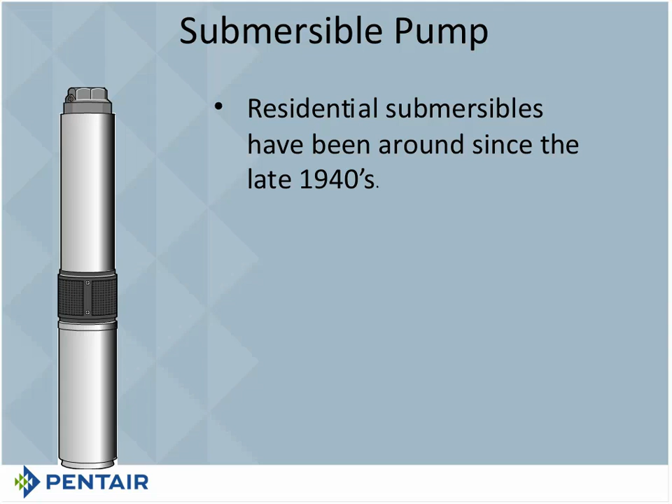So let's get started talking about submersible pumps now. The first point is that the residential pump we know today has been around since the late 1940s. It was really the motor that needed to be developed—they had the technology for the pump end, but they needed to get that motor small enough. They had pumps that were 6, 8, 10 inches, but a residence doesn't need that much water, so finding a smaller motor to put on a smaller pump end is what they needed. Once they got that in place, they were ready to take off.

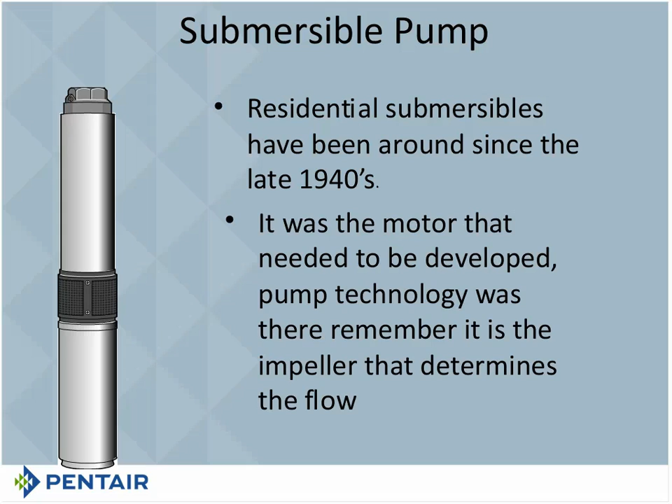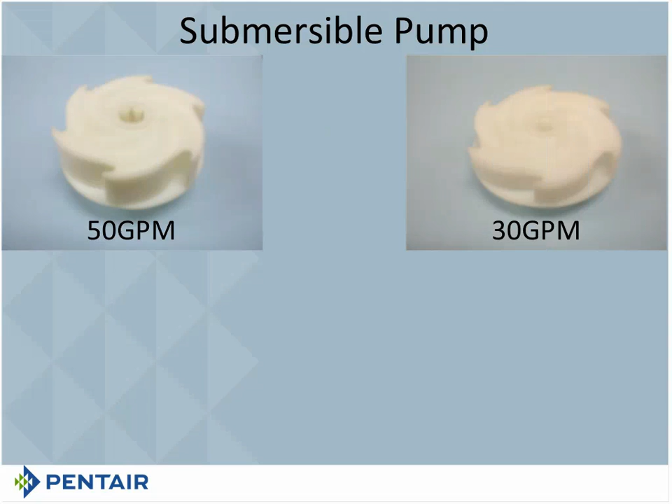Now let's talk a little about impellers. Looking at them, you'll notice there's a 50-gallon-a-minute impeller, a 30-gallon, a 20, and a 10. Some things they have in common, some things are different. First, let's talk about diameter—that's common to all of them, about 3.5 inches, and you can't make them any bigger than that. So the bottom line is all your 4-inch impellers are going to be about the same size in diameter.

Because they're the same size, we stack these pumps. These are still centrifugal type pumps—they work off centrifugal force. It's just that now you stack the pumps together rather than have individual pumps, because a small impeller like that wouldn't be able to give you much head.

What they have different is the port width. You'll notice that port width is different across them, and it's the port width that helps determine the flow rate—it gives you the maximum flow rate of the pump. So when they say it's a 50-gallon-a-minute pump, you'll notice it's got a big wide port width. If you look at that 10-gallon-a-minute pump, you can hardly see there are 2 pieces of plastic there. So it's very important.

A similarity they have—let's count them: 1, 2, 3, 4, 5, 6. They've all got 6 vanes. That's pretty much true no matter whose impeller it is, whether it's ours or one of our competitors'—they're all pretty much going to have 6 vanes.

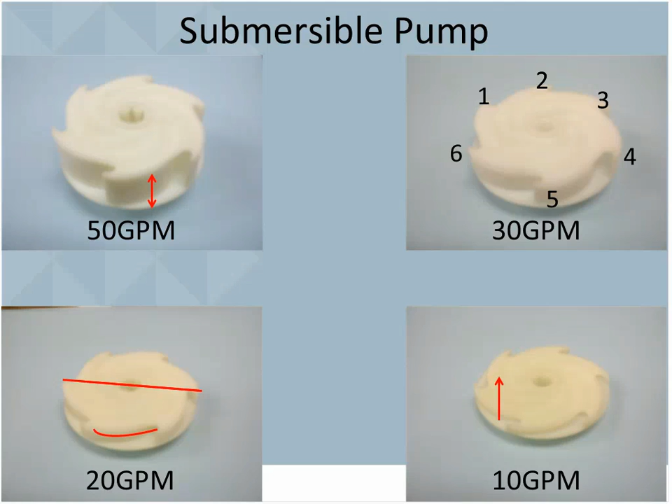So those are the things that are similar and some that are a little different. They've all got an eye, and again the eye is going to be a little different—notice the one on the left, the 10-gallon eye versus the 50-gallon eye. Remember, those impellers are the same diameter, so when it comes to the eyes, the eye with the 10-gallon is a little bit narrower than the eye with the 50-gallon.

And again, that's because we want to put more water through there. There's the eye right there. And then you'll notice in the middle there's a hub. You can see that the hub on the 50 is much deeper than the hub on the 10. Part of that is due to the fact that you've got that large port width, so that's going to require more hub.

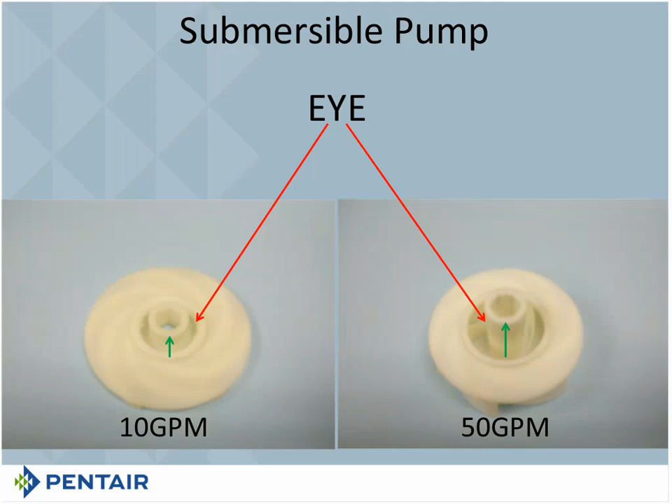The hub is the part that goes over the shaft and how you keep the impeller in place on that shaft. Now, every submersible pump, no matter who makes it, has to have an impeller. They also have some kind of a plate.

They all might be made a little differently. We make our plate like this. You can see there's a stainless steel piece in the middle, a big plastic piece on the outside, and if you look carefully, a little smaller plastic piece that fits over the top of that stainless steel piece.

The reason for that is because we're going to sonically weld these together. We're going to take these three pieces and use sound waves to heat up the plastic, and as that plastic gets heated up, it's going to melt together, making this all one piece.

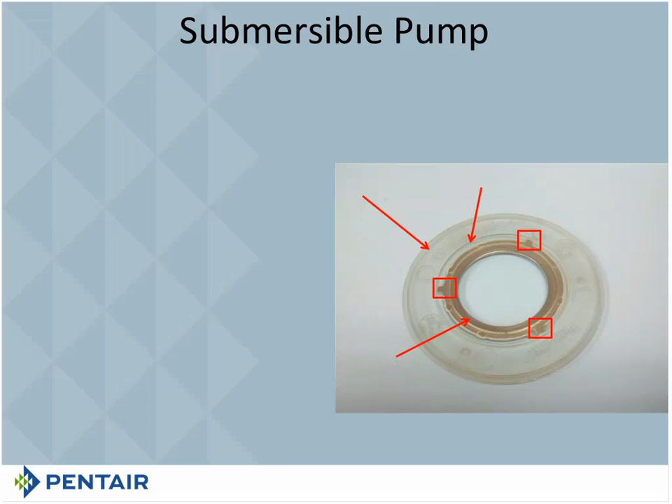You can see there's three little spots where the stainless steel has a little nib sticking out of it. The big plastic piece has a little spot where that fits right in. So when they set that in place and then put the small plastic piece over the top of it, that keeps the stainless steel piece from moving. That's what that's for.

Now the other thing that happens here is the eye of the impeller rides on that stainless steel piece. Because of that, all of the down thrust moves off to the side of the plate, pushed in the direction of that yellow arrow you see there.

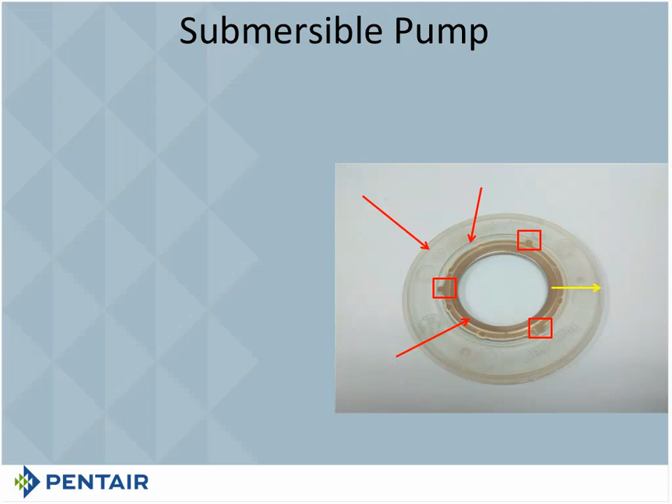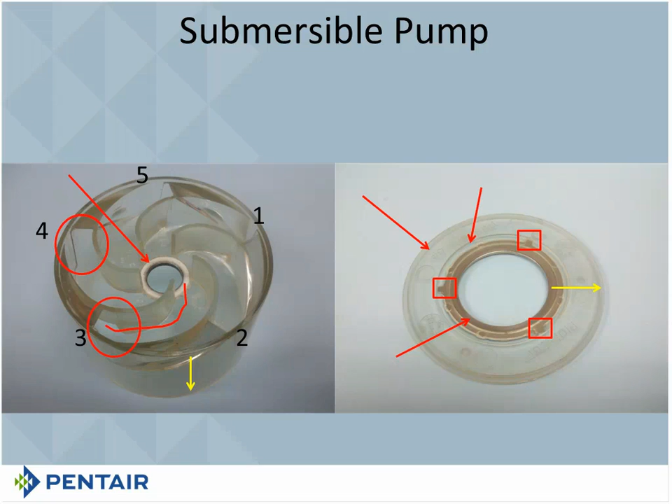I also want you to notice that we use a ceramic seal in the middle. That seal is actually bonded right to the diffuser. When we mold that plastic piece, the seal goes in first, and we mold the plastic right around it. It's got little bumps all the way around it to keep it in place so it doesn't turn.

So it depends on how you want to look at that. You'll see that the shaft hub sticks down, but it goes down into the diffuser and it rides on that ceramic seal. It doesn't put any pressure on the impeller that's below it. And again, that's one way that we eliminate down thrust on the motor.

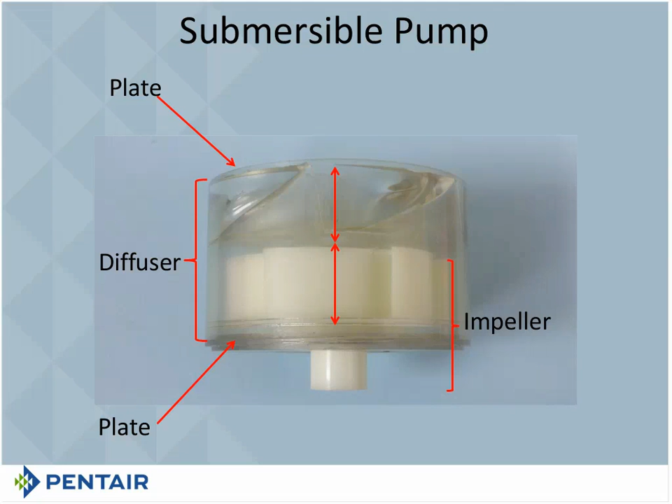So there's your opening for your impeller, and then if you look there, that's where the water is going to go up through the hole into the diffuser so that it can be pressurized and move into the eye of the next impeller or out through the discharge.

If you look at the top stage there, you see the ceramic seal. So the bottom of the hub sticks out at the bottom. The top of that hub goes up against the ceramic seal. There's a little bit extra plastic on top of that hub so that it sticks out and can ride against that seal, and the reason we do that is because that helps for upthrust protection.

If you don't have that upthrust protection there, what winds up happening is the top of the impeller rides against the bottom of the diffuser, and you wind up having some problems. So you eliminate those problems by having that little bit of plastic stick up off the top of the hub and rubbing against the ceramic. The reason they use ceramic is because it's a different material than plastic, so it won't spin weld together.

Now you see the stainless steel ring there. There's a little added extra plastic on that also, so that as the bottom of the impeller, the eye of the impeller, comes down and rests on that stainless steel ring, it holds the actual bottom of the impeller off of the bottom of the plate, or top of the plate. So again, you're not going to get any spin damage.

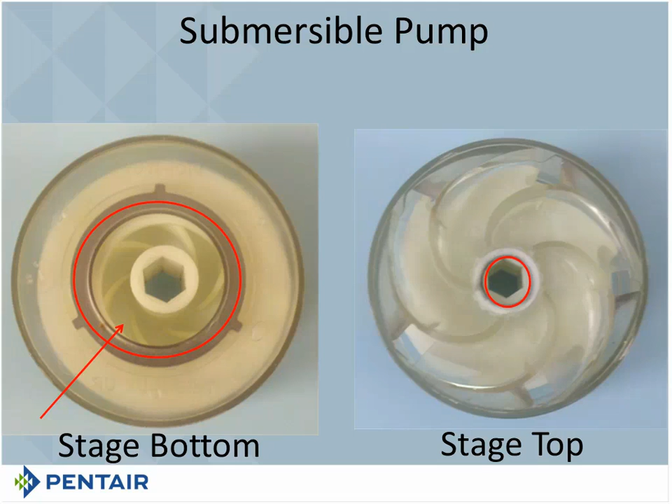Not all of our pumps, but some of our pumps have a thrust pad in them. The thrust pad is a patented area. When you're looking from the top down on the thrust pad, you see that it looks brown. When you're looking at the bottom up, you see that it looks black. That's because the bottom of that thrust pad is a carbon impregnated cloth, which makes it look black.

Then there's a slight little piece of rubber in there. And finally, the brown piece that you see on the top there, that is a stiffener, because what happens is when that cloth gets wet, it loses its shape or its form. So that stiffener helps to hold it in place.

You'll notice also that it is hexagonal, and it fits very nicely over that hub because, in fact, it does exactly that. It fits on that hub, and what happens is when that pump goes into down thrust, that black part is facing the white ceramic seal. So this piece sits between that hub and that seal, and should sand happen to come up between there...

Of course, the main purpose of that thrust pad is to seal a round hole that's in the ceramic. So that ceramic goes all the way out to the edge of the black part there, and of course you've got the hexagonal hub going up through there. You can see that the hub, or the shaft, is not going to touch that ceramic if it's held in the center the way it's supposed to be.

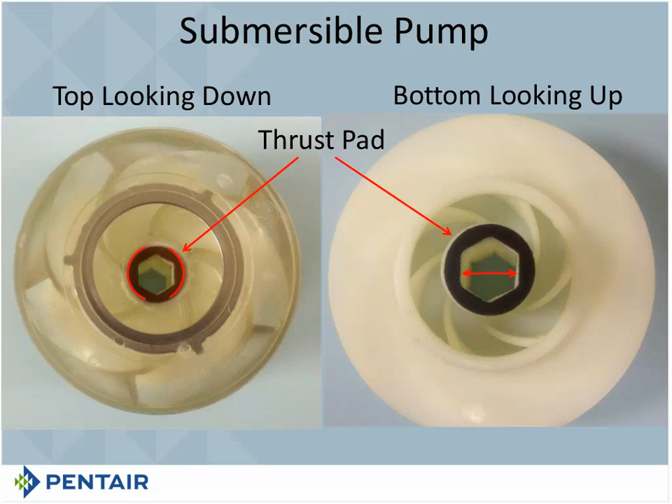But that does create some openings, we'll call them holes if you want to. And so, this thrust pad is going to plug up those holes. So there's your thrust pads there. You can see they are hexagonal, and they can move up and down.

Now of course it doesn't move that far. We're talking tens of thousandths of an inch, not inches. But it does have some play, some movement, and the purpose for that movement is because we want to allow sand to move through the pump. This movement up and down that the impeller is allowed to do, if sand happens to get trapped in there, when it goes to start up it pushes down and can allow that sand to wiggle its way out, so that we always keep that sand moving.

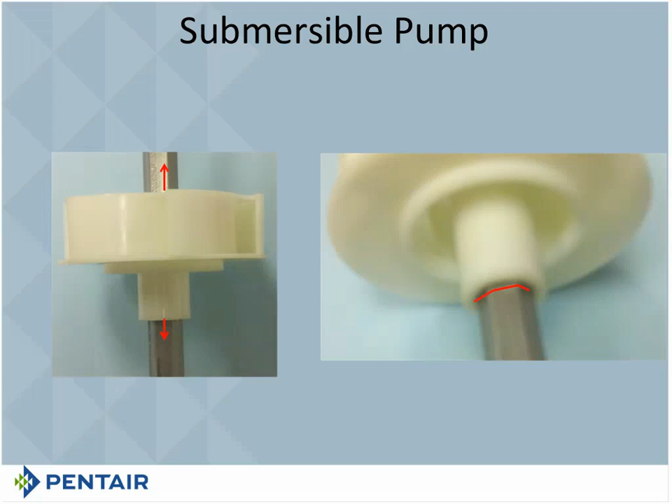As you can see, this bearing is sealed on the top. There's a cap on it, and a lot of pump companies have gone to putting a cap on their bearing, and the reason is because once that cap is on there, the bearing can produce pressure on the inside, and it kind of keeps debris from moving up into the bearing. So you get a positive pressure on the inside of that bearing that pushes down, and when sand or grit wants to come up in there, it kind of gets deflected away.

You'll notice on this particular brand, the Sta-Rite Berkeley brand, they put a little clip - they cut that groove in there so they can put a clip in there, and what the clip does is hold the whole stack together. On some floating stack or floating stage pumps, if that clip's not there, if you pick up on the stack without lifting up on the shaft, you leave the shaft behind. So putting the clip on there guarantees that stack stays right with that shaft.

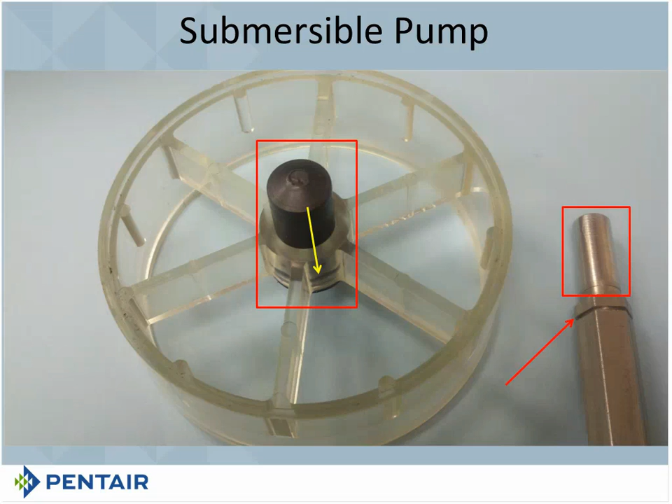Again, we round off the end of that shaft so it'll fit up in that bearing, and you've just got the plastic on the stainless steel there. They're very close tolerances, but they do allow some fluid, water, to get up in there, and that's what creates that down pressure to kind of push the debris away. It sits on there kind of like that.

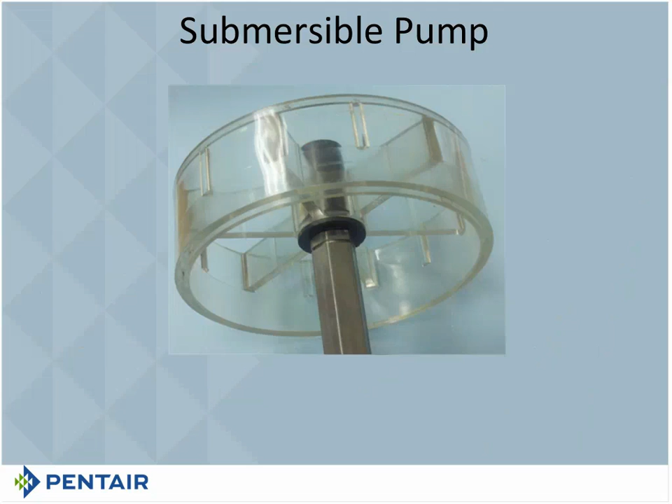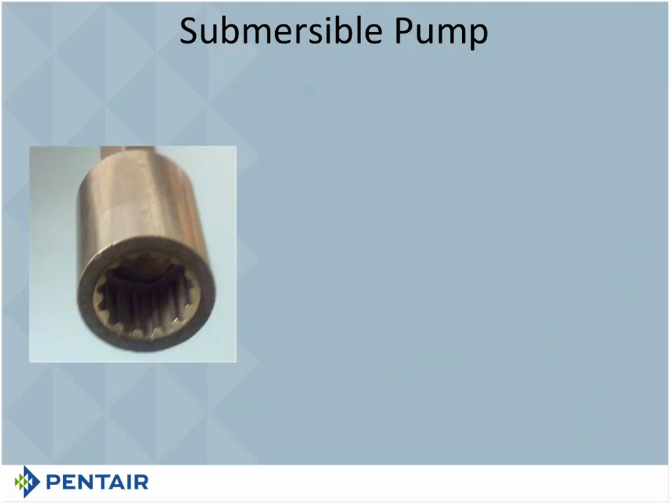Now, if we look at the other end of the shaft, we're going to look at the coupling. You can see that the coupling here is pressed on, because you can see the top of the shaft there. And of course, we can see that the coupling is very flat across the bottom. Unlike some couplings that have a little angle on them, these are flat on the bottom.

So we use a special sand boot on ours. If you are going to use our pump, you have to use our sand boot too, because otherwise sand can get up in that coupling, and that gets you a free trip to Australia. Well, it did me anyway. So you might not, but I got a free trip to Australia to explain to the Australians that they had to use our sand boot.

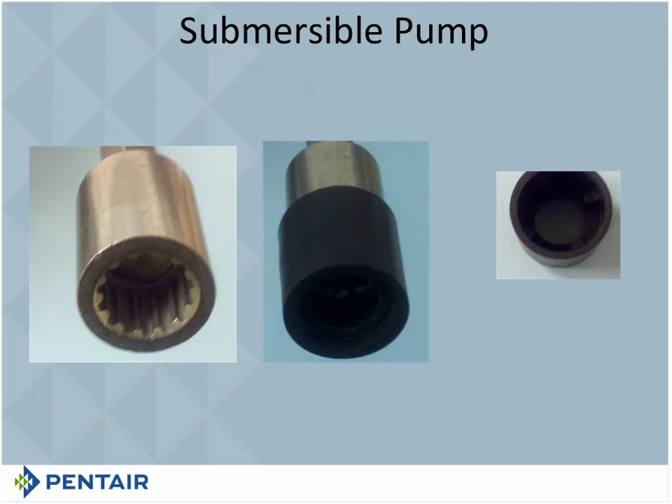When you look at the coupling end, the sand boot end on that coupling, you can see there's four little rubber pieces sticking out - one fits there, one's there, and the last one is there. So when you push that up on the coupling, there's a stop, and they're going to stop in the same spot all the time, which allows you to cover up that hole completely. Now, if we look down, it's going to fit right against there.

And what's going to happen now is if you look at the bottom end of it, the motor end, you'll see there's a little indention there too, and again that protects the motor from sand getting into the motor. So the sand boot is really designed specifically for the Sta-Rite Berkeley pump, and I think they also use this on Myers now too, so those are the ones we use that on.

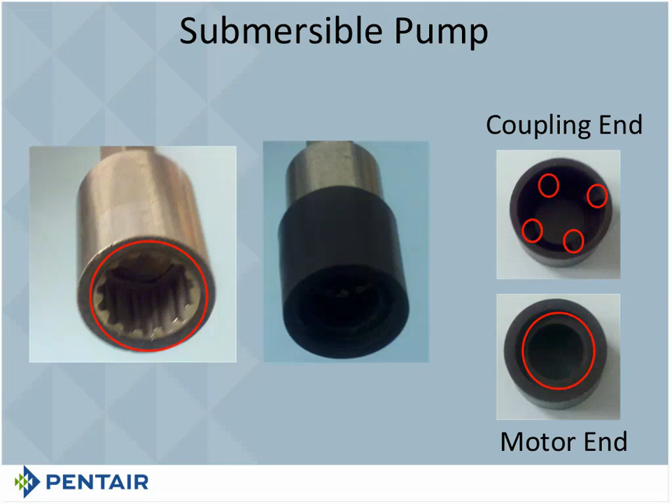Now let's talk about different types of stacks, because when pumps first started coming out, they used what's called a fixed stack. You can see that fixed stack had a round shaft in it, and it had a keyway cut into it.

And then, of course, the impeller had a keyway cut into it. What we would do is we would put a key in that keyway. And now what you can do is fix the impellers right to the shaft. And that's called a fixed stack pump.

Now, part of the problem with the fixed stack pump is you can see down in the bottom there, the coupling is going to connect to the shaft of the pump, which is connected to the rotor. Now, of course, the problem comes in here.

Every time a pump starts, the pressure above the pump is less than the pressure below the pump, and so the pump moves in upthrust, and it lifts up. No, not that much, just an illustration. When we go into down thrust, the opposite happens and we push it down.

Now, the point is that up and down thrust is being felt in the motor because, remember, the shaft of the pump is connected to the shaft of the motor, which is connected to the rotor. So let's go take a look at the bottom of the motor.

This is what is called a Kingsbury type bearing. They named it a Kingsbury type bearing because a guy by the name of Kingsbury invented it, but his cost a lot of money, so we made one similar to that. So the industry uses a lot of Kingsbury type bearings now.

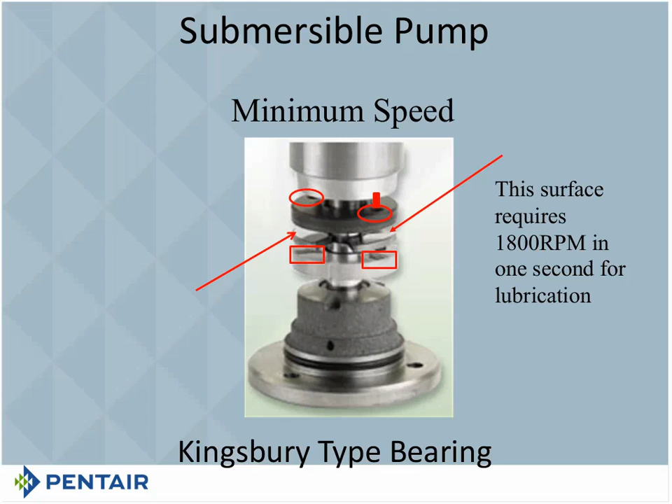The fluid inside the motor that's used as a lubricant starts out as a combination of a food-grade glycol and water. It's a 40-60 mix, so 40% glycol, 60% water. Over time, because of the way the motor is made, the glycol is completely replaced with well water, and this is why they are called water-filled motors. We'll talk more about those when we get into submersible motors, though.

Now we're talking about pumps. So, with the problem of not having the upthrust and downthrust on that motor, the industry moved to what was called a floating stack pump. Now, the floating stack pump, you've got a hexagonal impeller, and the impellers are all going to have a hexagonal hole in them.

Now, the difference between this and the first pump we were talking about is this pump has the impellers sitting on top of one another. So the hole where the seal was is filled up by the hub here. And so when this pump goes into down thrust, all those hubs are sitting on top of one another.

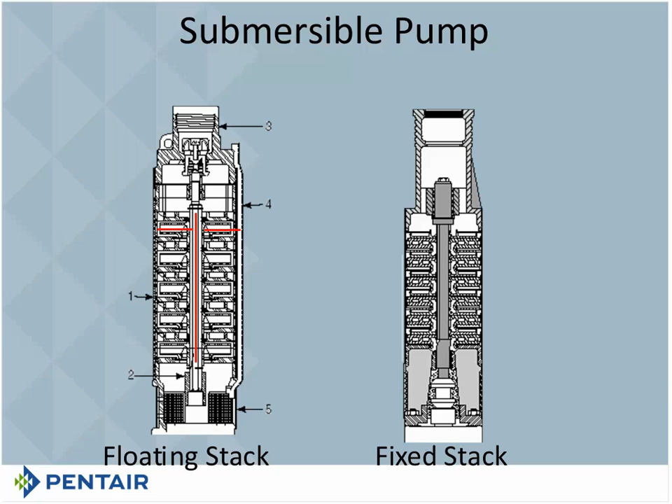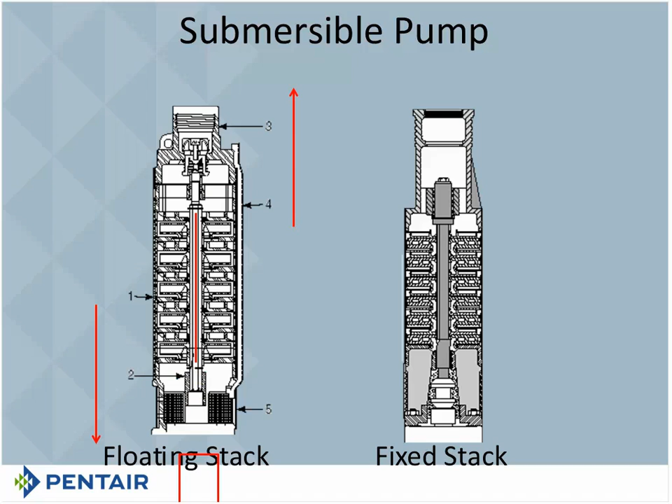What this means is that the connection here on upthrust, they're going to move up, but they do not pull up on that coupling area, because they're not connected. On downthrust, however, they do push down on that coupling, and so you do get downthrust in the motor. Hence is why we went to the design that we use. And of course, there's your spacer with your stainless steel piece.

That's your thrust pad, there's your impeller, and here's your diffuser with your ceramic seal. You're going to stack all those up, and you can see there's a stack of those inside that shell.

There's your spider with your Nylatron bearing in it. Then we've got the discharge of the pump, made out of stainless steel, and inside that discharge is a check valve, a built-in check valve. Not all, but most pumps have built-in check valves, and that built-in check valve has 5 pieces to it.

If you wish to take the check valve out of the pump, you need to take the discharge off, and that can be tricky if you don't know how, depending on the brand. The Sta-Rite and Berkeley brand pumps have left-handed threads, so righty-tighty, lefty-loosey does not apply. Sometimes I give engineers a pipe wrench and say take this apart, and if they're new and don't know what they're doing, they try righty-tighty, lefty-loosey, and all they do is tighten it up more.

The other thing you have to realize is when we put this pump together in production, there's just a small bead of Loctite that goes all the way around that discharge. It serves two purposes. The first should be obvious, it's Loctite. The second purpose, however, is a sealant, so if you want to take this apart, you need to heat up that end of the pump.

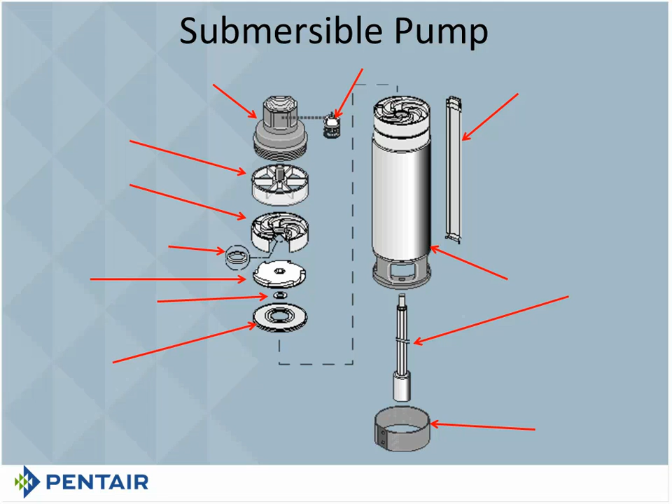Now, what we're looking at here, the pump on the left is the Sta-Rite Berkeley design. The pump on the right is the Aermotor design. Remember, we own all these brands. It's a true floating stack pump. The one on the left is Sta-Rite Berkeley, as I mentioned, and that's a true floating stage pump.

So some of the differences between them: you can see the impeller rides right on that stainless steel ring. That way the down thrust moves out towards the outside edge and then all the way down onto the suction of the pump. That's how we eliminate down thrust in the motor. Now, you still get up thrust and down thrust in the pump, but it eliminates the down thrust in the motor.

And the Aermotor design, what they wind up doing—you've got those impellers that stack one on top of the other, and so that down thrust is going to go down through the whole shaft. Right underneath the coupling, they've got a little piece, and you have to take the screen off to see it. That piece sticks there and catches the coupling, so the coupling can't push down on the motor. That's how they designed it. It's very good design, and it eliminates down thrust in the motor also.

Your internal check valve is there, and as I mentioned, you can see a much better picture of it. If you look carefully, you can see that the check valve is made up of 5 parts. There's a screw that you can't see—it goes right down the middle from the top down. Then there's a hard plastic piece on top, below that a rubber piece, and below that another hard plastic piece and the spring that fit up into part of that hole.

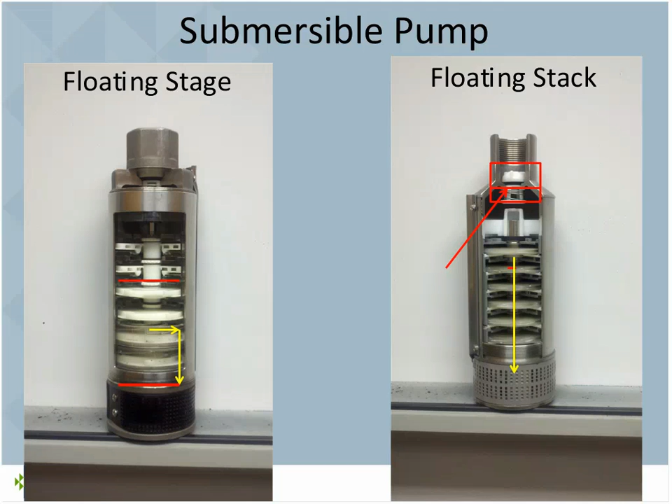So there's your check valve. That's the top part, that's the bottom part. Remember, the top part has 3 parts to it: a screw, that big plastic piece, and the black rubber piece. The bottom piece has a plastic piece that the screw screws into, and the spring. They all use the same check valve, doesn't matter what, they all use that same check valve.

Now, I would not be doing you justice if I didn't tell you that Myers has a stainless steel pump, an all stainless steel 4-inch pump. Typically you're going to find stainless steel in the 6-inch line, but Myers also has a 4-inch design. It's called the S series.

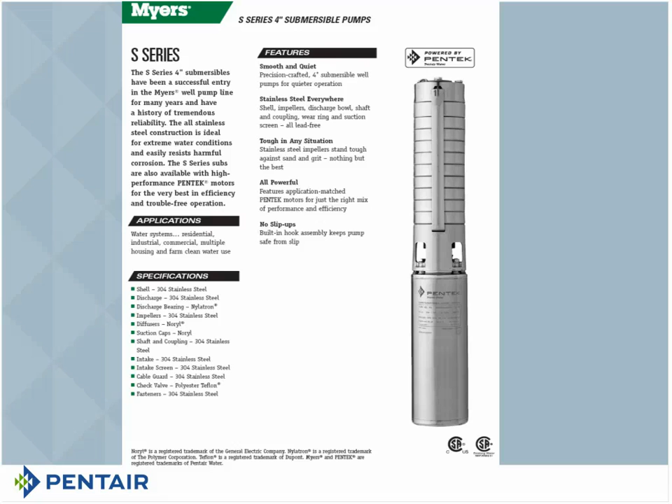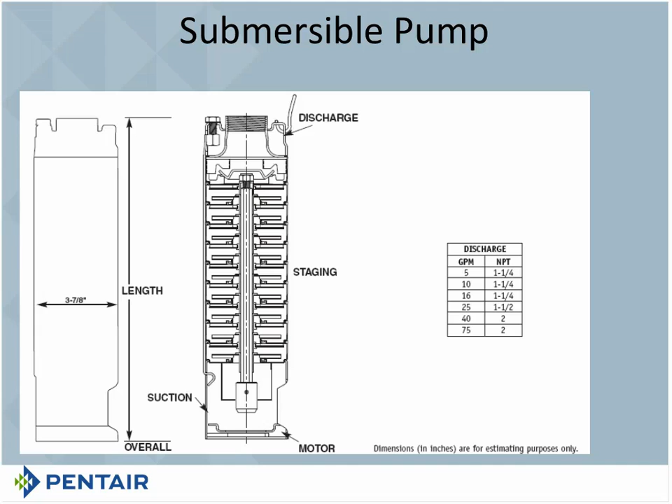Now I do want to mention, just because the discharge is 2 inch doesn't mean that the pipe size on that 75 gallon a minute pump should be 2 inch. I would strongly encourage you to go with a 3 inch pipe and just put a connector there to go from 2 to 3. That would be my suggestion.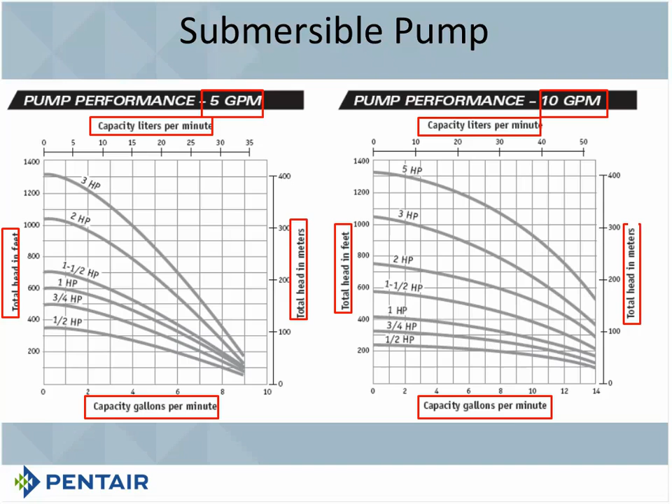What it means simply is this: you're going to connect one to the other. Liters goes to meters, and feet of head goes to gallons per minute.

This is the 12 gallon a minute Aermotor pump, and you'll notice again capacity in gallons per minute on the bottom, cubic meters per hour on top. Now that's not liters per minute, that's cubic meters per hour. And again, you've got feet of head on the left-hand side and meters of head on the right-hand side. You'll notice, if you look carefully, that there's a line connecting those two together and a line connecting these two together, so you try not to make a mistake. We don't want any mistakes out there.

Interestingly, when you look at this curve, you're going to notice that there is a shaded-in area. We didn't see that on the Myers curves, they don't do that, but Aermotor puts a shaded-in area. The shaded-in area is telling you that this 12 gallon a minute pump is going to work best if it's in that shaded area. The shaded area goes from 6 gallons a minute to 15 gallons a minute. So when we're using that 12 gallon a minute pump, basically that's what you're looking at there.

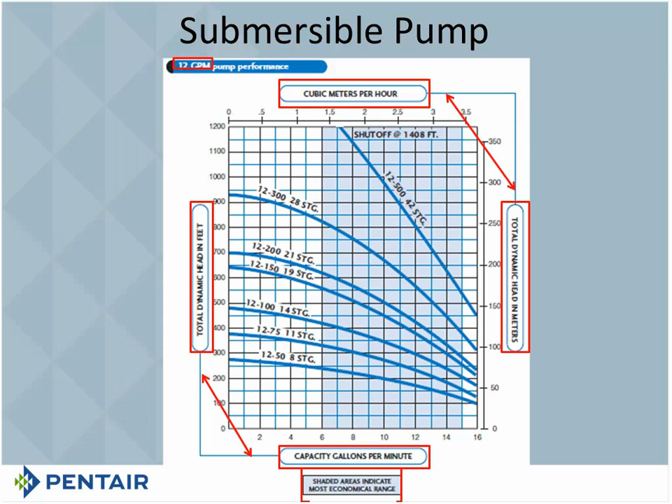Now, the next thing you're going to notice is we're looking at the Sta-Rite Berkeley curves, and this is the 10 and 15 gallon a minute pumps. They've got flow in gallons per minute on the bottom, liters per minute on top, head on the left-hand side in feet, and on the right-hand side in meters.

Something interesting about this curve is, while that pump is rated at a certain rating, 10 or 15 gallons a minute, you'll notice there's a dashed line on the left-hand side that does not go perpendicular. The higher the flow of the pump, the more angle there is to that dashed line. When you go from the left-hand side down that dashed line to the solid line, now you're in the area the pump should be working in. That dashed line is a down thrust area where you could have problems if you stay there too long.

If you look on the right-hand side of each curved line, you'll find another dashed line. That's the upthrust area. If you go into that upthrust area, don't stay there—get the pump out of it ASAP. Because if you stay in that upthrust area too long, you're going to wear the upthrust protection off of that impeller, and then you're going to have a problem.

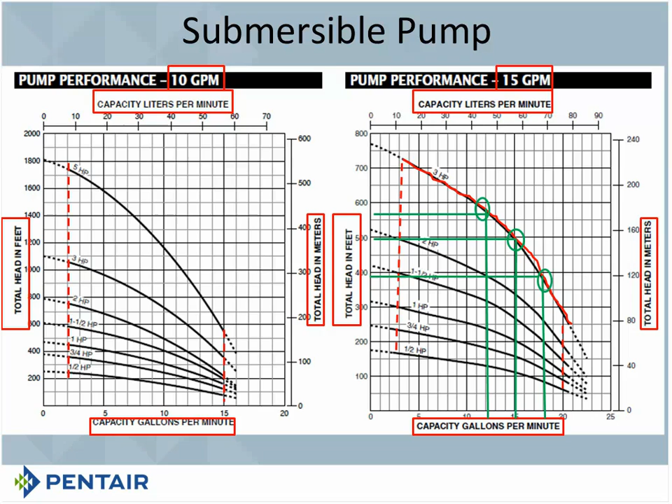Remember, you can work anywhere in between those dotted lines, but if you're looking for pump efficiency, you'll stay within that 20% range. It's up to you what you want to do. When we give you a design point on a pump, that is usually the best efficiency of that pump, and that's why we give it to you. So if you want to keep this pump efficient, stay within that 20% range, but you can operate outside of it. And remember, when you're looking at variable frequency drives, that changes some of these things too.

Now let's look at a box chart, specifically for the 10 gallon a minute curve. It gives you the horsepower of the pump, and then your discharge PSI. Interestingly, each of those has a 0 in them—the half horse has a 0 PSI, the 3/4 horse has a 0 PSI, the 1 horse has a 0 PSI. Then it gives you your pumping depth in feet. This is total head, TDH, and it starts at 20 and goes all the way to 1,000 feet.

So if we look at the half horsepower pump, there are your pressure ratings. Remember, TDH looks like this—those are all the factors you're looking at when calculating TDH. What's your pumping level? Pumping level is made up of elevation, standing water level, and drawdown. What's the service pressure required to accomplish the task you want? Remember, when using a pressure switch, you generally choose the medium pressure—so if it's a 40-60 pressure switch, you choose 50 PSI to work with. And most importantly, and the reason it's on top, don't forget friction loss.

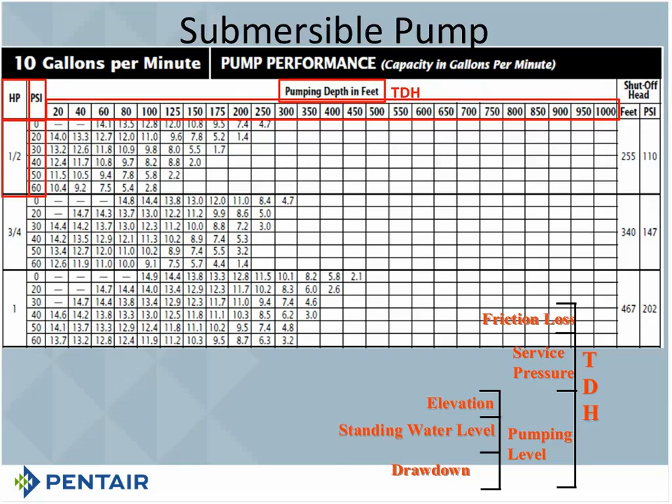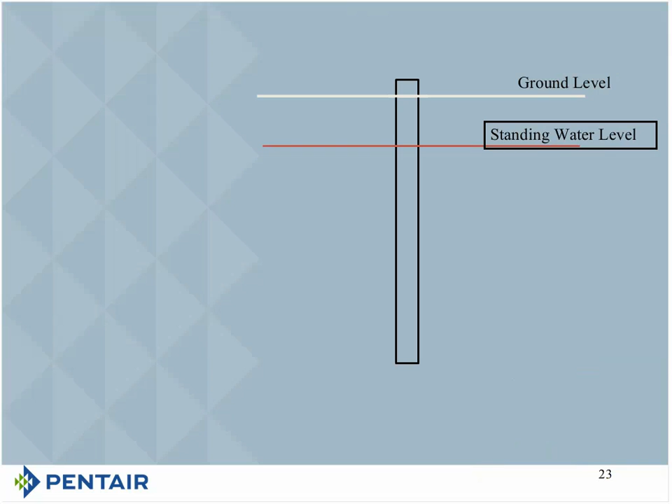Now let's talk about what happens when you put a submersible pump in a well. So there's our ground level, and right here is our water level. Someplace under that ground level, there is a standing water level. We're going to drill a well, 4, 5, or 6-inch well, whatever, and put that casing in there. At the bottom of the casing, most of us, not all, but most of us are going to put a screen.

The purpose for the screen is to keep big debris out of the bottom of that well. We don't want debris in that well. Then we're going to go ahead and put our pump in the well.

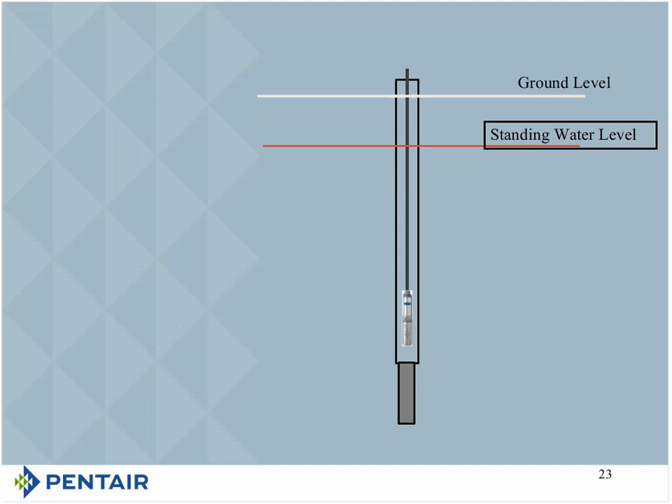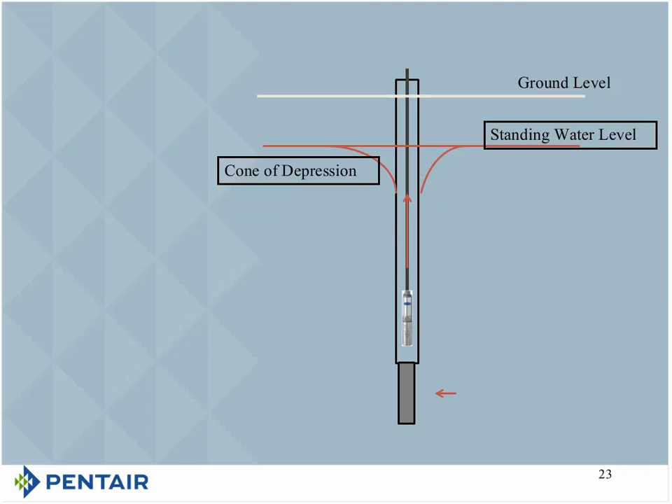Now, when we turn the pump on, well drillers call it a cone of depression. All the way around the well, so many feet out, that water table starts to drop. That means the water table in the well starts to drop too, because water always seeks its own level. It continues to drop until the water going into the well equals the water going out of the well. When the water going in equals the water going out, we've reached something called equilibrium.

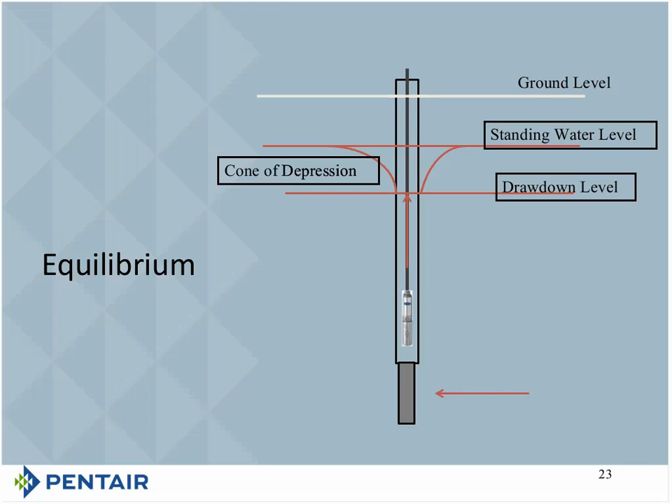Now, that equilibrium level, pump installers call the drawdown level. The reason they call it that, and this is important if you call in and ask us a question, is because the drawdown level is the working level of the well. So when someone asks how deep it is to water, that standing water level is nice to know, but the drawdown level is imperative.

Those of you who live in the mountainous area out west, or on the East Coast, there are a lot of rock wells out there. What I mean is you're drilling down straight through rock, and the little crevices, the fissures in the rock, allow water to stream into your well. Of course, stream is all it does. You're looking at maybe a half a gallon, if you're lucky, 2 gallons a minute. So if you put a 10-gallon-a-minute pump in that well, you're going to draw that well down.

You do have the capability of drawing the well all the way down, so quite often that's an application where they'll drill the well quite deep, 400, 500, 600 feet. They'll stick a pump in the well that's quite large, and even though the standing water level might be very high, because you have the capability of pumping that well all the way down, that well now becomes a reservoir that holds water.

So if I've got 400 feet of water between the pump and the standing water level, when I turn that pump on, basically if I've got a 6-inch well, we're talking 1.5 gallons per foot. So I take 1.5 gallons times 400 feet, that gives me 600 gallons of water that I can use. That's part of my water storage. However, once that water gets used, now I'm out of water, and I have to wait for that well to recover a little bit.

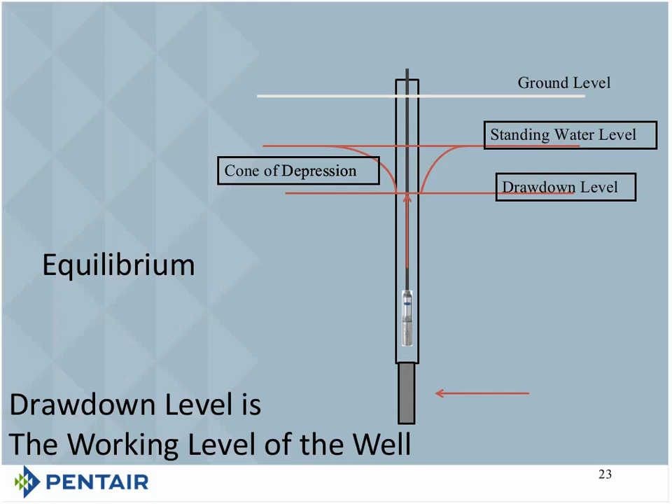Because if friction loss gets lost in the middle and you forget to count your friction loss, you might not have the pressure you need to do the job you want to do. Service pressure relates to where you're getting your water from, which for most of you is going to be that pressure tank, and where you want that water to go to.

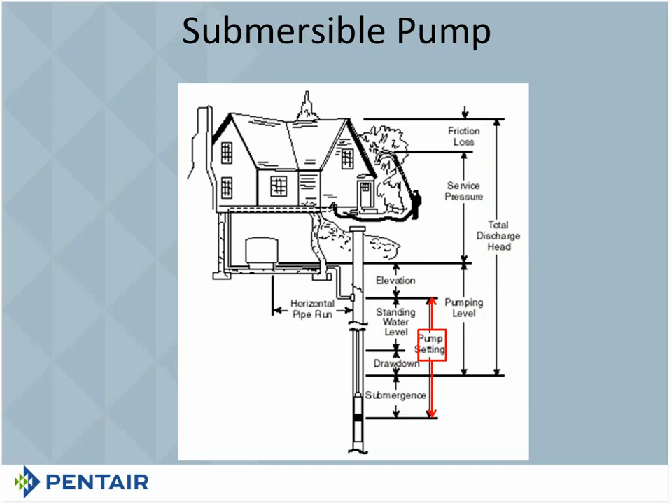Now we get rid of all that, and we're going to start talking about something called the pump setting. Pump setting is measured from the well exit to the pump, and basically what it's telling you is how many feet of pipe are in that well. So we're looking at how much pipe is in that well so we can calculate friction loss.

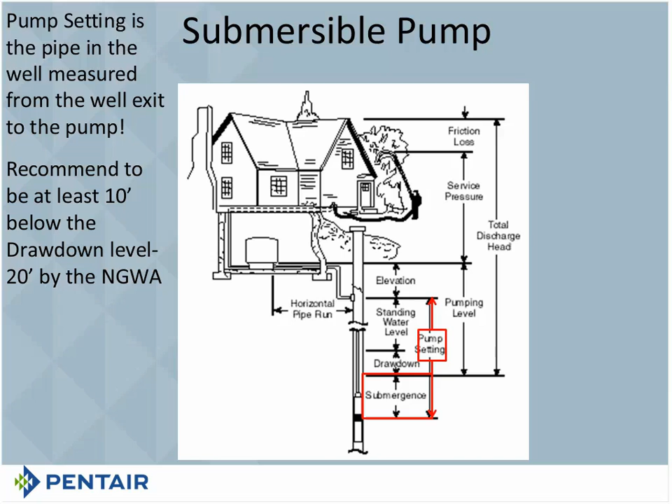Next, we're going to look at submergence. Submergence is how far below the drawdown. Note the numbers on the left-hand side of your screen. Most pump companies recommend that you be at least 10 feet below the drawdown level with your submergence. The NGWA recommends 20 feet - they want you to be real careful, so they recommend 20 feet below the drawdown level of the well. You can go deeper if you want, but those are the minimum levels. The reason those minimums are there is because if you don't have enough water over the top of the pump, you'll wind up having a dry run situation.

The horizontal pipe run is talking about from the well exit to the pressure tank. Remember, the well exit can be a pitless adapter, or the well exit can be the top of the well - it's just how much pipe is going to go from that well over to the tank. Remember, it's linear feet of pipe, so in this picture you'll notice you've got some elevation there that the pipe is running through too. So you've got to count all that pipe.

The tank is the point of usage for an installer. From the tank to the bathroom on the second floor, that's the plumber's job. You need to know what the plumber wants, but you have to realize your job ends at the tank. Every once in a while, at least a couple times a year, we get phone calls from people who complain and say, well, I don't have any water pressure in my shower if I turn my dishwasher on or I turn my washing machine on.

The reason is because the plumbers come out of the tank with half-inch pipe. We know friction loss, I preach friction loss, but for some reason the plumbers don't get it. My best friend was a plumber, and when he and I would talk about friction loss, he would get so mad at me and say the plumbing code says 8 feet per second. I don't care what you say, I'm going to the plumbing code. Now, of course, what he didn't realize was that by going to the plumbing code, he was causing his customer to require more horsepower to get the job done.

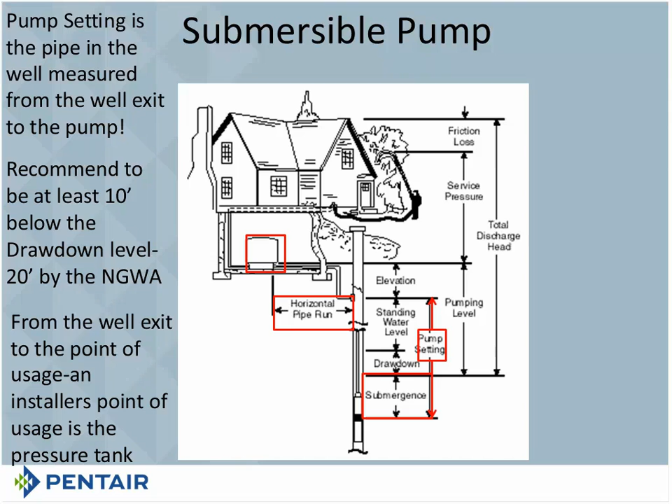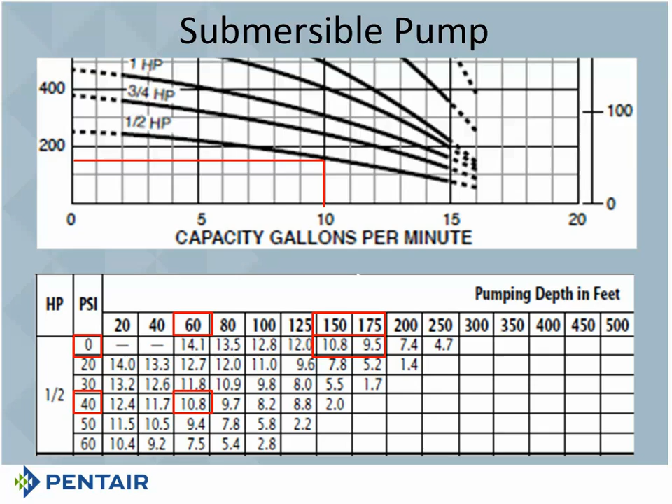If you subtract the 40 psi from the 150 feet, you're going to be at about 60 feet, and now you can see that the 10.8 at 60 feet with 40 psi is the same as the 150 feet at 0 psi. So that's a very valuable lesson, and I want you to understand it. Don't add your pressure in twice, you only have to add it in once. So if you're looking at pumping depth in feet and it's got the pressure added in, you need to look at 0 psi. If you're looking at a chart and it doesn't have 0 psi on there, then take your pressure out of your pumping depth in feet and look at your pressure in psi and look at that new feet of head.

Okay, I don't see any questions, so we're going to move on then.

You're going to notice here, and this is for the Sta-Rite Berkeley pumps, the 10, 15, and 20 gallon a minute have a 1.25 inch discharge. The 30 and 50 have a 2-inch discharge, and I just wanted you to see that.

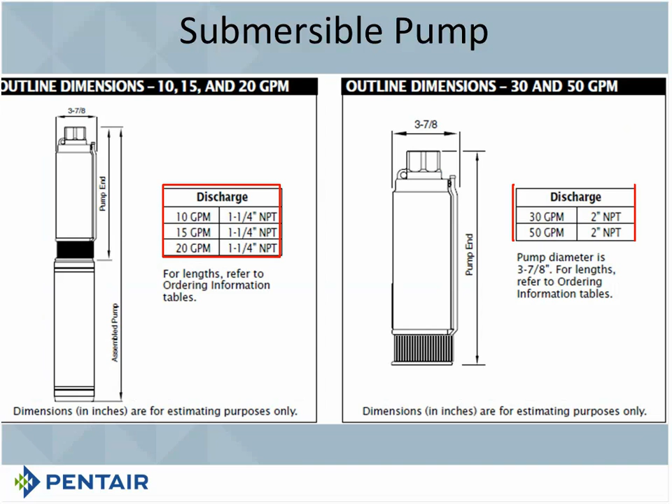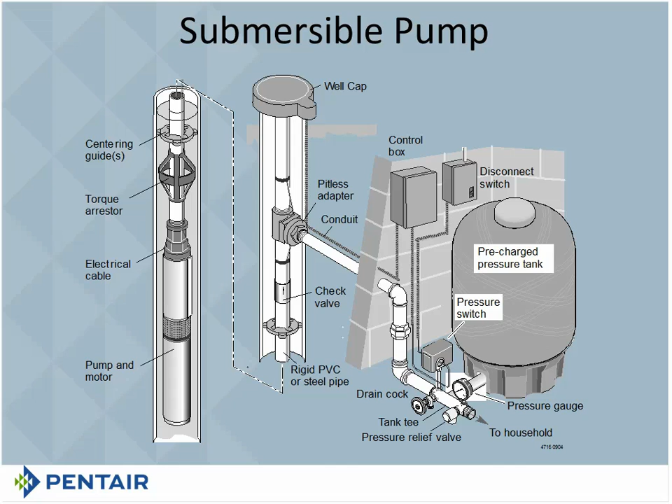You'll see a pressure gauge on that tank because everybody likes to know what the pressure is, and of course you're going to see a pressure relief valve. It's a very cheap insurance policy, so make sure you've got one on there. I don't care where else there are pressure relief valves, put one by the tank. Let's say you have gate valves on either side and you forget to open the gate valve on the discharge side of that tank. Then you're going to wind up deadheading that pump, and you don't want that to happen. That's what that pressure relief valve is for.

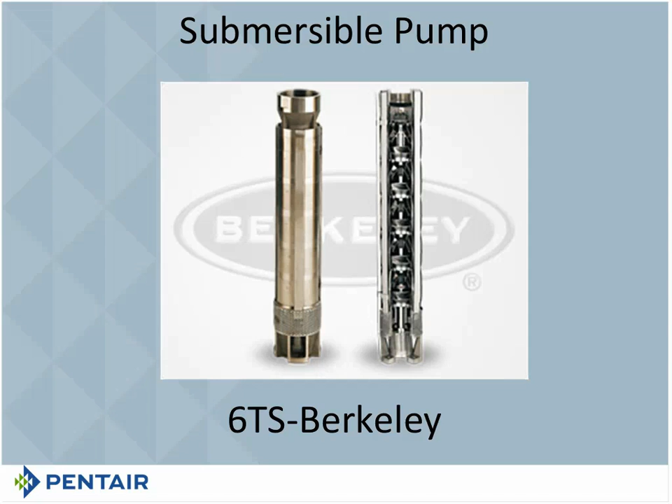The Berkeley 6TS is an all stainless steel 6-inch pump. When I say all stainless steel, I mean everything is stainless steel in there. You've got stainless steel impellers, stainless steel diffusers, stainless steel everything. It might be different grades, but it's all stainless steel.

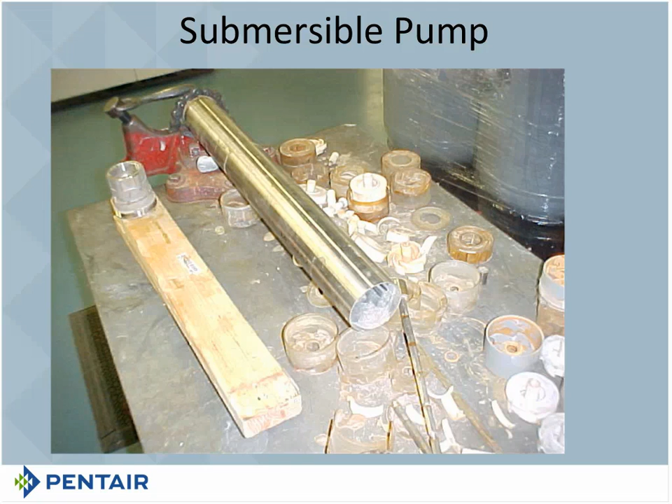This was that mining pump that I talked about earlier. You can see if you look carefully, that shaft is in 2 pieces. We didn't make it that way - that's what happened when that shaft rubbed up against that ceramic, and you can see the stainless steel lost that battle.

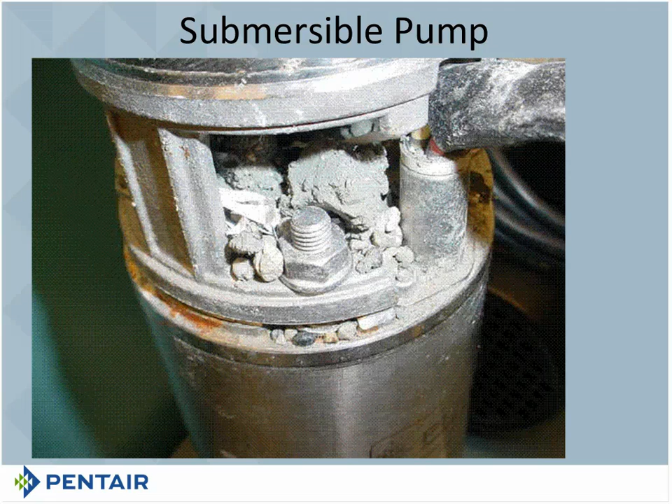Here's a nice shot of somebody who tried to use the pump without the screen on it to clean out the drilling fluid, and you can see that's got chunks in it. Those chunks don't go through a pump - it's not an auger. You need that screen on there to protect it.

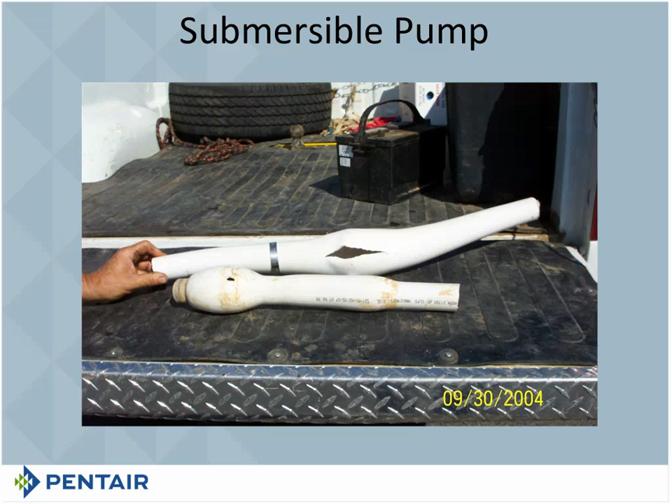Some of you may have seen systems like this before, where you see the pipe swell up and bust. That happens when you deadhead a submersible pump. You can see the pipe in the front there happened right at the discharge. So that pump turns and turns and turns, and as it turns, it creates heat in that system. That heat swells the plastic pipe up and eventually breaks a hole in it with the pressure.

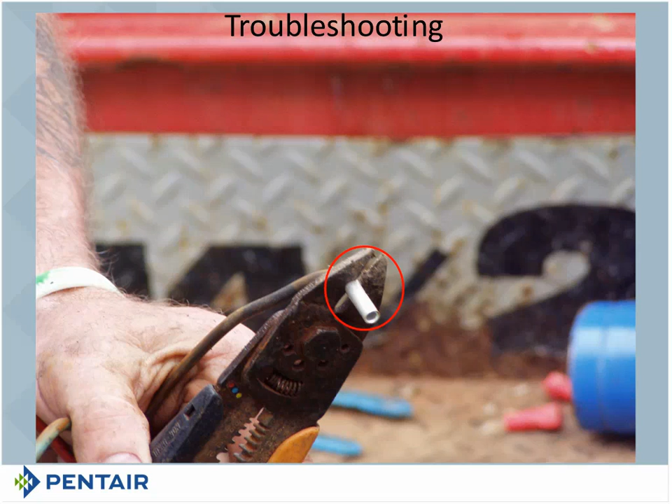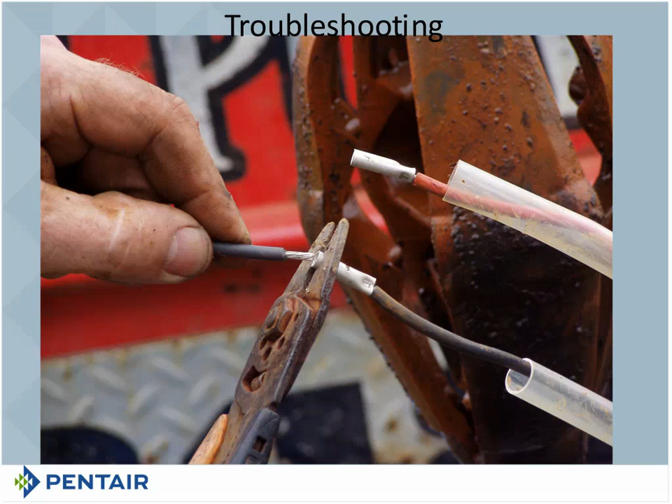Now, this is very important: take your tubing from your shrink wrap and put your tubing over the wire before you crimp the other wire onto it. Otherwise you've got 100, 200, or 400 feet of wire to bring that tubing down through - you don't want that. So make sure you do it right. Then go ahead and stick your other piece in there and crimp it nice and tight.

Once you get it crimped, it requires a blowtorch to heat these shrink wraps up. You cannot use a match, you cannot use a lighter, you have to use a blowtorch. The key is don't get them too hot, but you've got to use that blowtorch. You'll notice in that picture that when this shrinks, on the inside there's a little bit of material that bubbles up and comes out. When it comes out, that means you've got a nice tight fit on there - that's what you're looking for. That prevents water from getting into that connection.

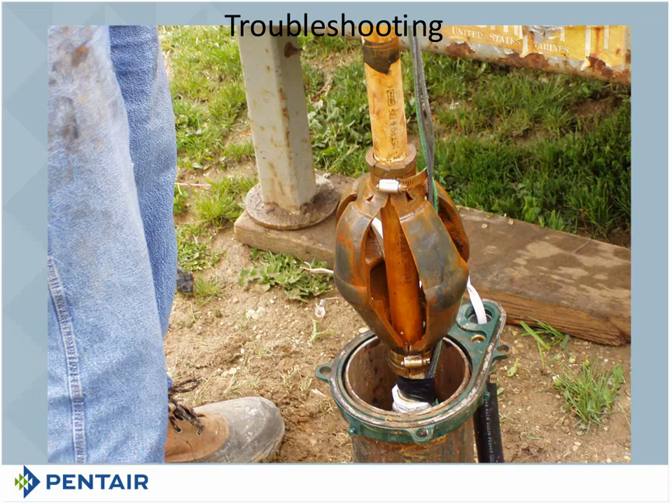Again, because we're using plastic pipe, we're putting this pump down with a torque arrestor. You can see the torque arrestor is just a smidge bigger than the well casing, so when I put it down, it's going to go down tight. You can also notice the wire does not go underneath the torque arrestor, but over the top of it. So don't put the torque arrestor over the wire and clamp it down tight - make sure the wire goes over the top of that.

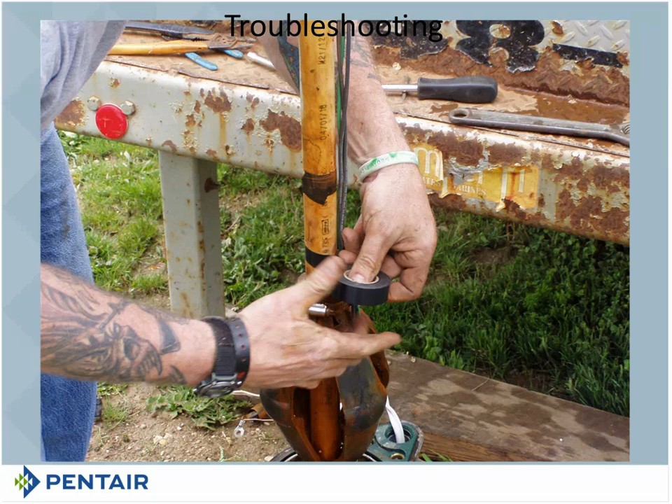Most guys are going to tape their leads to the pipe system every 5 or 10 feet or so, to keep that wire from slapping up against the casing and winding up having to strip it a little bit. Because if you wind up nicking that wire just a little bit, it'll short out, and then you'll have a problem.

Are there any questions about this presentation?